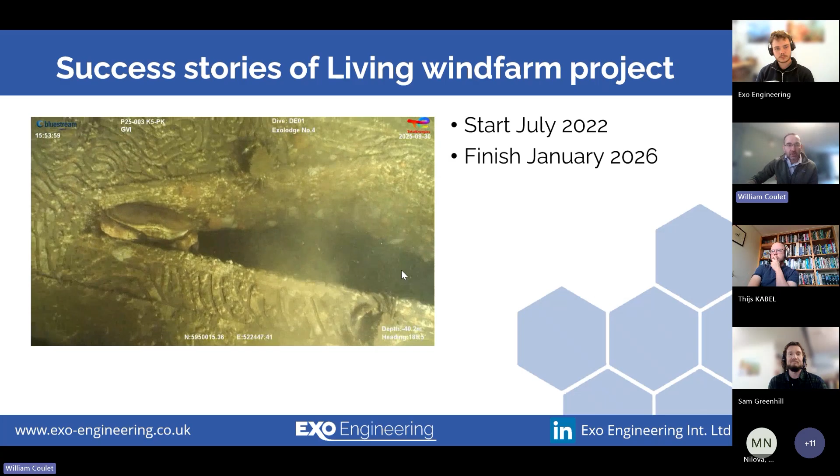We can probably spend quite a lot of time talking about success stories, and we talked about success stories in previous workshops. We have hours worth of exciting footage we could share, and this is one example. I'll just play this short video, and I'm wondering if anybody can guess how many species we can spot in this footage.

This footage was 40 meters depth in the North Sea on our Exo Lodge artificial reef. We encountered 64 species during the September survey, which is an amazing result, and we're very pleased with it.

But rather than basking in the success of what we've achieved, I'd like to share our journey and take you back to how this all began, because the Living Windfarms project didn't start at TRL 1. It started a long time ago.

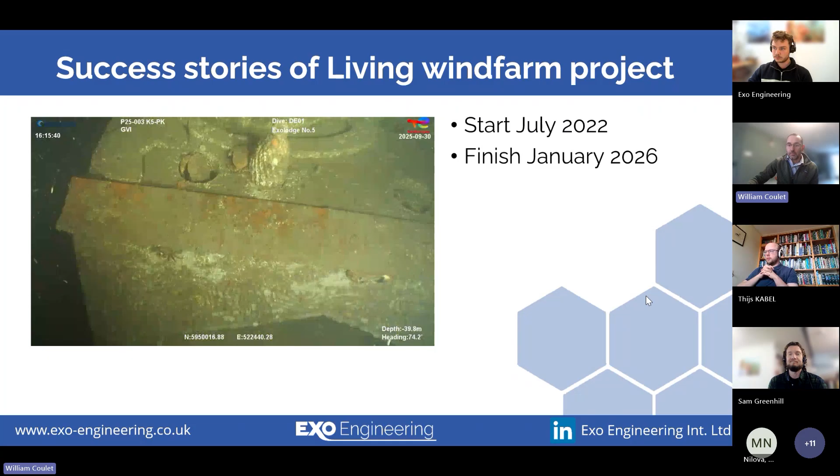So let's go back in time and see where we started. Just for a little background, some information about TRL for those not completely familiar with it: there are a few different approaches, different descriptions of each level. Doesn't really matter - it's a staged approach from 1 to 9.

But you must be wondering, why on earth do we want to start talking about TRL? Because Exo develops products. The TRL stages or levels are really easy to explain where we are, and it runs from basic principle to commercial product. So in order to revisit the entire project, the TRLs are easy to appraise the workflow.

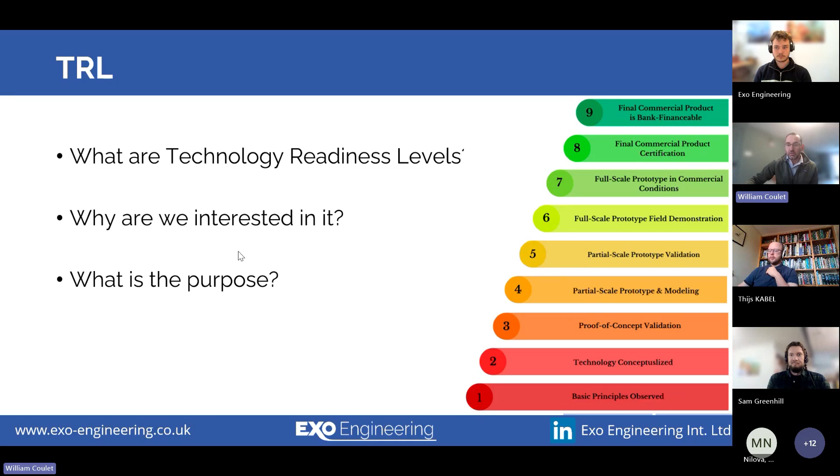There are several factors and market insights we'd like to share, and for that purpose we've split the workshop into these TRLs. I've got the pleasure of covering the early TRLs, whilst Thijs and then Sam will cover later stages.

So we started off a long time before July 2022, before the Living Windfarms project. Particularly, we focused on 2 concepts: GeoBlock trademark and technologies, which developed our mixing blends, and secondly, the design criteria for reef development as researched. In 2022, initial products like the hexagon reef and spheres were explored and tested.

So I'll delve into these in a little more detail. We've carried out more than 8 years of blend development under the GeoBlock trademark, which includes studying carbon content, recycled content, beneficial use of dredge material, local or natural content, and a range of exotic binders, which then led into blend economics.

Blend economics, or the economics of the mixed blend, was a critical aspect for appraisal as part of our growth path. As you can imagine, some of the exotic or unique binders can be very expensive and did not always make it through to market. So from test cube to biocolonization trials, we spent years appraising the options. This is a biocolonization trial carried out in Newlyn many years ago.

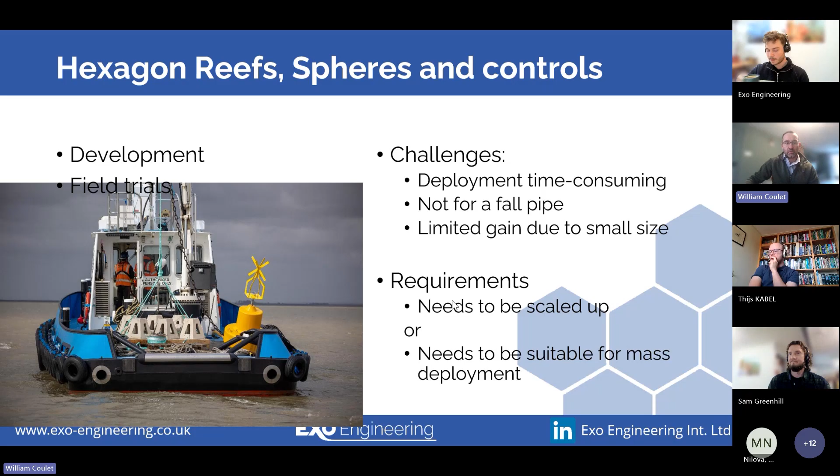So based on these experiments, we were able to further define targets and what the Living Windfarms project should have been focusing on. This involved scaling up some solutions, whilst other solutions were focused on mass deployment. So that's another picture of that deployment.

The third aspect we looked into was stakeholder engagement or market research, carried out in the shape of stakeholder engagement interviews, workshops, and other interactions with offshore developers, contractors, ports and harbours, aquaculture, and coastal protection. It actually improved our understanding of the market and market demand, and in particular the current species and habitats focused on, such as Atlantic cod, sabellaria, and native oysters.

But it was also a criteria to look at the importance of health and safety, especially around deployment. And finally, this market research told us about market demand, specifically around mixing blends and mix economics as well.

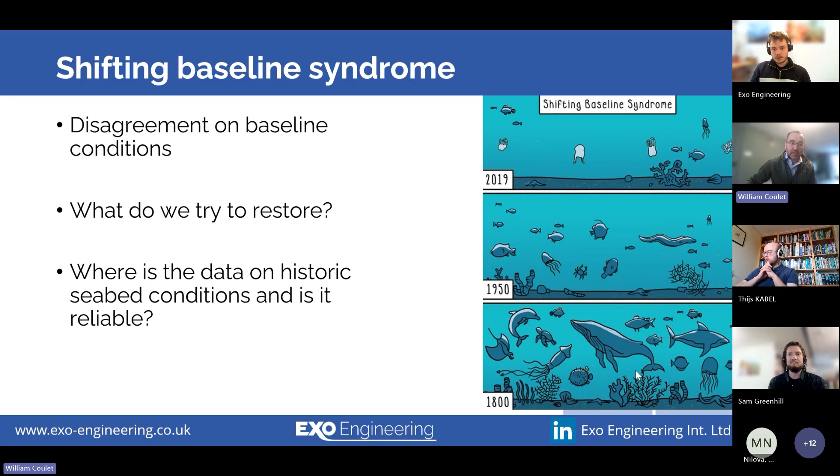So we've been talking about specific species and the target species, but this is only a small amount of species that is actually focused on by the wider market. And the habitats that we use as reference points, such as the baseline habitats, are possibly suboptimal due to the shifting baseline syndrome. So we do need to consider the shifting baseline syndrome when we develop the projects. But we found that there is no international consensus about marine baseline, for example, for the North Sea biodiversity across the bordering nations. So that's an element that we believe needs improvement when it comes down to restoration and nature-inclusive designs. So how are we able to restore the marine environment without the regulated consensus across the borders?

So this market research pointed out specific attention should go to the following criteria, in addition to the blend economics that we've mentioned. Habitat function, for example, and habitat features relate to offering of food and shelter for adults, eggs, or juveniles. The design needs to consider hydrodynamic stability, scour properties, and deployment in order to be successful.

So we had all these criteria that allowed us to create and develop new products.

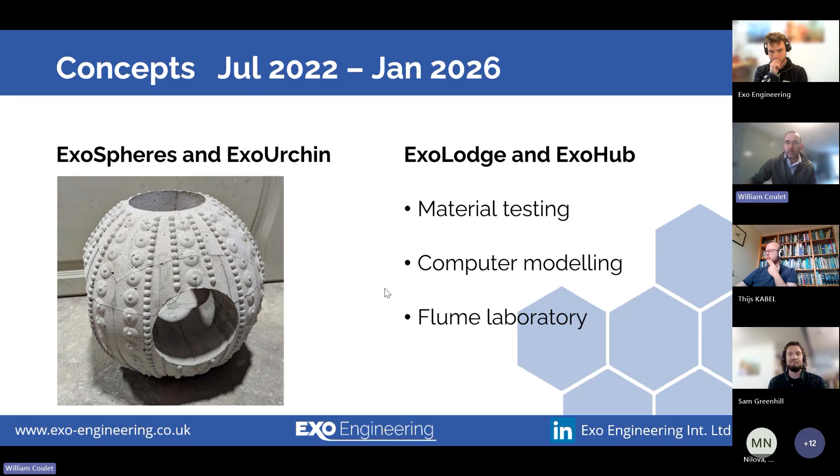So in July 2022, as part of the Living Wind Farms project, we started further developing the exospheres and subsequently developed the Exo Urchin. We also developed the Exo Lodge and Exo Hub. The Exo Hub is focused on native oysters.

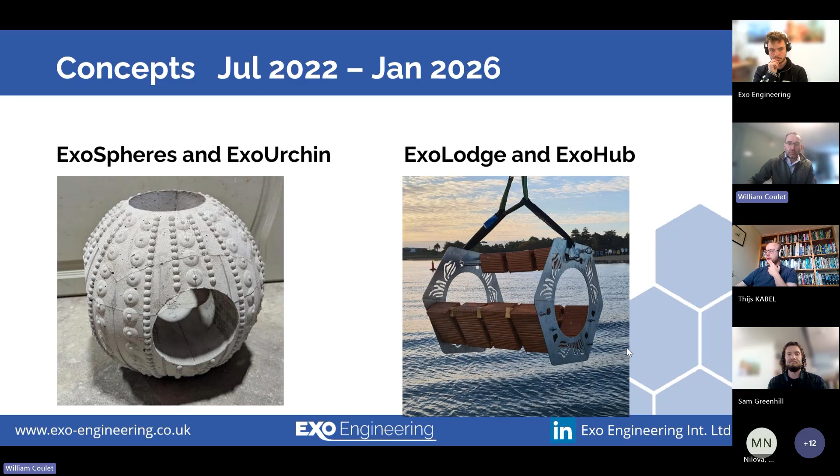So these 4 concepts were further developed during the project, and material testing, computer modeling, and laboratory testing was furthermore carried out.

So my main takeaways from the early TRL was that market research has led to numerous nature-inclusive designs, and those nature-inclusive designs are only limited by our imagination, but sadly have to answer to market demand. If there's no demand, then the nature-inclusive designs don't necessarily make it all that way.

So market demand is often driven by unit cost and deployment methods, and in contrast, blend design, so the binder design, as well as unit complexity, which drives high cost. So unit complexity often drives biocolonization and species richness, but both drive high cost, which is obviously not good for market demand. And only a small number of target species are prioritized, which we mentioned, whilst there is no international consensus about marine baseline.

So these takeaways, I think, are the main takeaways that we had in the years kind of predating the Living Windfarms project.

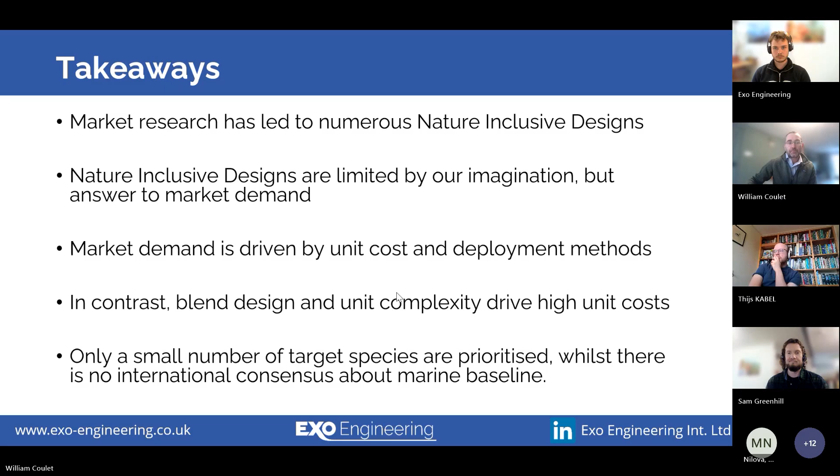So I've got the pleasure now to hand over to Jack, who's going to cover the middle TRL here. So thank you so much, and I'll close my presentation.

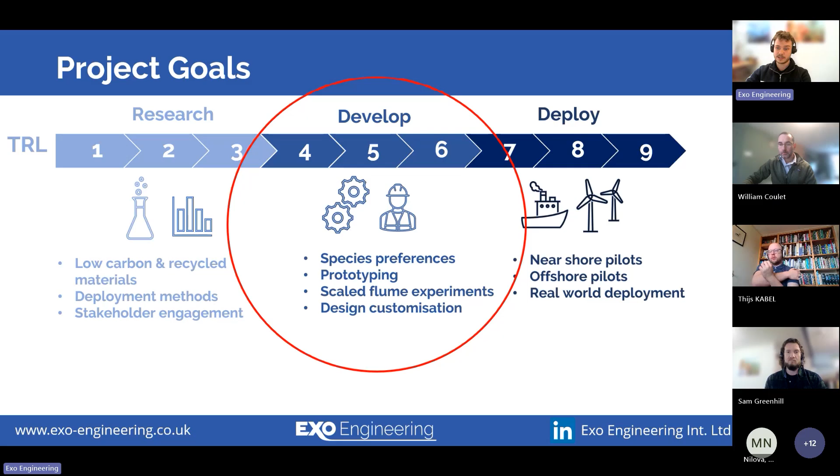As William mentioned, I will be exploring the middle TRL levels, which focus on design, testing, and prototyping. Of course, there is still research being undertaken as we move into the middle TRL stages, but the focus is more broadly on developing concepts and solutions which have demonstrated potential to meet the market needs. These stages involve considering species preferences, prototyping, and scaled flume experiments, and I will also be touching upon the opportunities presented to us through the use of bespoke design.

William has already spoken about material selection and broadly about nature-inclusive design, but it's important to highlight that this only forms part of the consideration. Many of the solutions developed under the Living Windfarms project perform a dual function of scour protection for offshore wind and habitat provision. We therefore need to make sure that by increasing opportunities for biodiversity, that we aren't compromising the functionality of scour protection, and I'll talk about this in a bit more detail shortly.

Looking at ecological function now, though, how can we optimize the design of marine infrastructure to maximize the benefits for biodiversity?

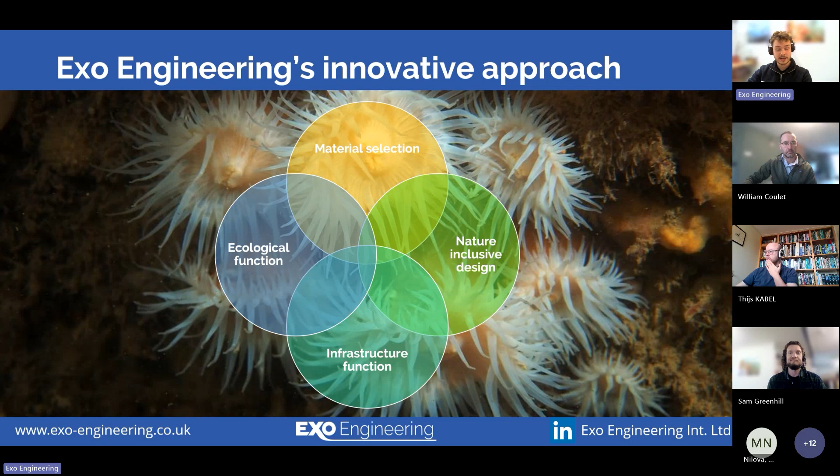As I'm sure most of us will be familiar with, each organism, from phytoplankton to seaweeds to cod, occupy an environmental niche. This is the combination of habitat conditions which are most favourable to the species, and we can think of this as their preference.

And there are a number of avenues that we can explore when considering how to design products with species preference in mind. For Exo Engineering, these fall within 3 broad groups, which are conservation evidence, biomimicry, and tender documentation. Now, of course, this doesn't mean that we pick one of the 3 and exclude the others, and these approaches are almost always used simultaneously.

So to start off with conservation evidence, deployments which have already been undertaken are a great source of information which can shape new, optimized, nature-inclusive designs. These studies are often highly scientific and provide us with information on deployment location, the different successes of projects, and key considerations moving forwards. These are all collated on one platform.

And we know that knowledge sharing and collaboration is essential for continuing the progression of nature-inclusive design. And another platform that we can use is the Rich North Seas Toolbox. Much like conservation evidence, the toolbox presents a range of projects which have been undertaken to enhance biodiversity and provides us with a quick overview of key things like costs, the different species which have been targeted during the project, and among other important aspects.

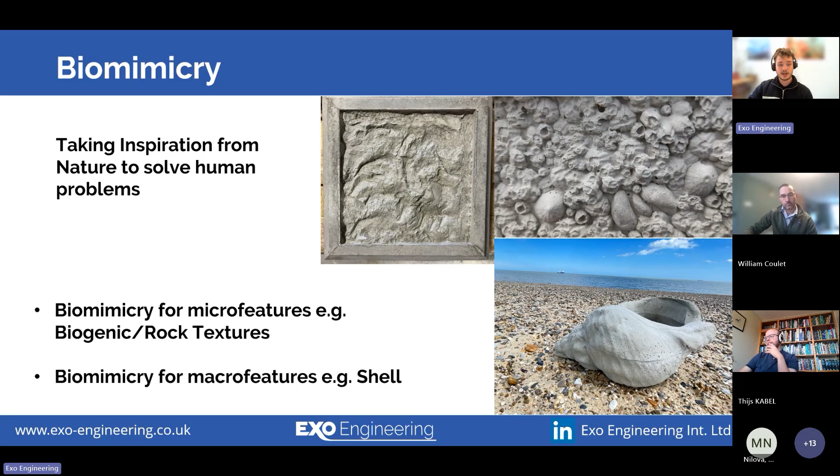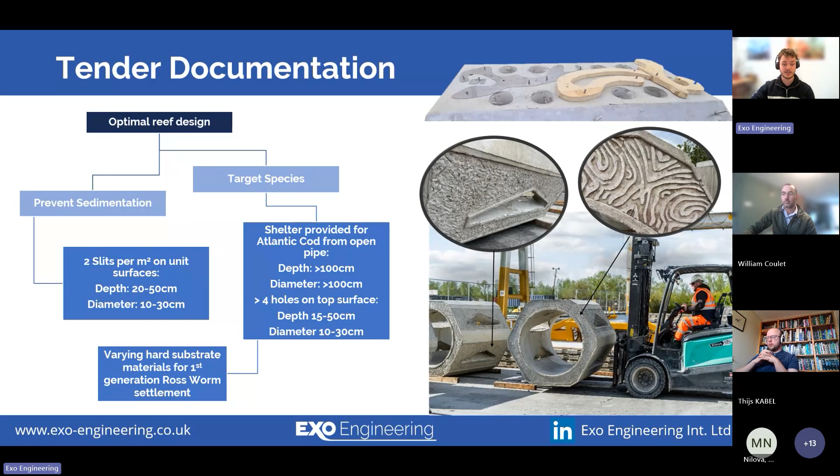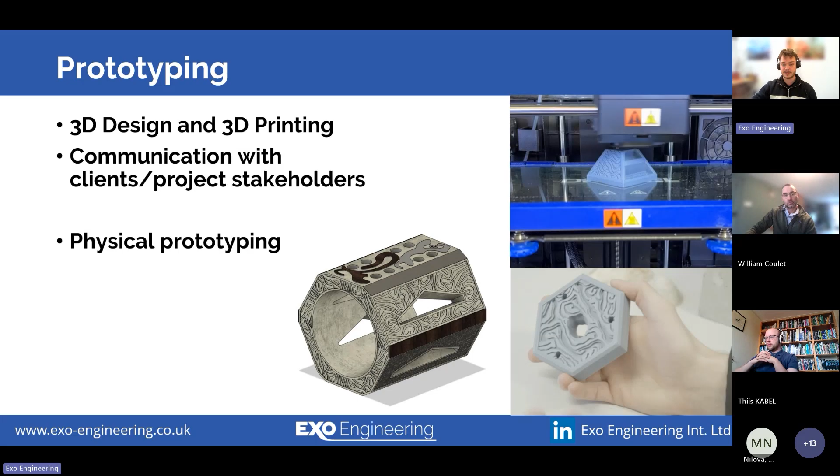After this, we come to the prototype stage. This stage covers a range of aspects such as 3D design, 3D printing, and physical prototyping. Starting with 3D design, it allows us to visualize our ideas and bring abstract concepts to life, applying knowledge gained in the lower TRL levels. It's where ideas really begin to take shape, often involving lots of tweaks before moving on to the next stages. We've also got 3D printing, which is incredibly helpful for visualization, and can help clients communicate designs and ideas more easily through a physical scaled down model. Speaking of scaled down models, we can also use these for flume experiments. Another aspect of prototyping is actually producing the product, which provides information about aesthetics, how it looks, molding and demolding requirements, and can help highlight aspects which might have been overlooked up to this point.

Going back to flume testing — so far we've focused mainly on how we can optimize designs to maximize the benefits for nature. But it's equally important to consider how these units behave when they're actually on the sea floor. For nature inclusive scour protection, it's essential that the anti-scour properties aren't compromised through the introduction of nature inclusive design. We've got a few different methods to simulate the behavior of an object on the seafloor, especially with regard to underwater currents, and one of these is flume tank experiments. In collaboration with the University of Southampton, scaled flume experiments were used to test both our exosphere units and our exolodge units. During the scaled flume tank experiments using the exospheres, results confirmed that they retained very good anti-scour properties — you can see this from the sand waves before the exospheres, imagining the flow of current going left to right in the right-hand photo, and after the exospheres there's not a whole lot of disturbance of the substrate downstream.

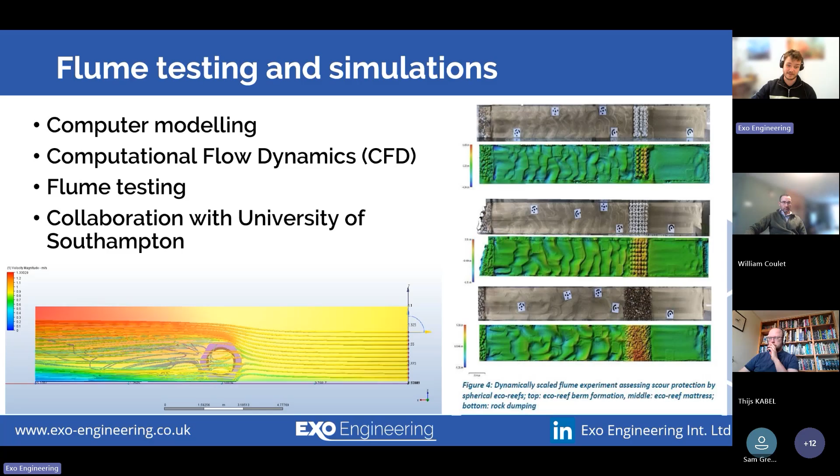That leads us to bespoke design, which is the final topic I will be covering today. When we speak about bespoke design, you might instantly think of designing an entirely new nature-inclusive unit from scratch. And whilst this is something Exo Engineering have done before, such as with the Exo Lodge in response to tender documentation, bespoke design can also just refer to tweaking existing designs.

In order to make sure they are most suitable for deployment in a chosen environment. Many of us probably agree that a one-size-fits-all approach is not optimal across the very diverse range of environments in which we find our offshore infrastructure. And with bespoke design, it gives us a real opportunity to optimize biodiversity enhancements.

So we've recently begun thinking about ways we can tweak the Exolodge design to best fit market demands. This has included attaching sacrificial anodes, which help reduce corrosion at offshore energy sites. We've also looked into incorporating pre-spatted structures, which support oyster regeneration, and even the addition of trees to boost the amount of available habitat for different species to colonize.

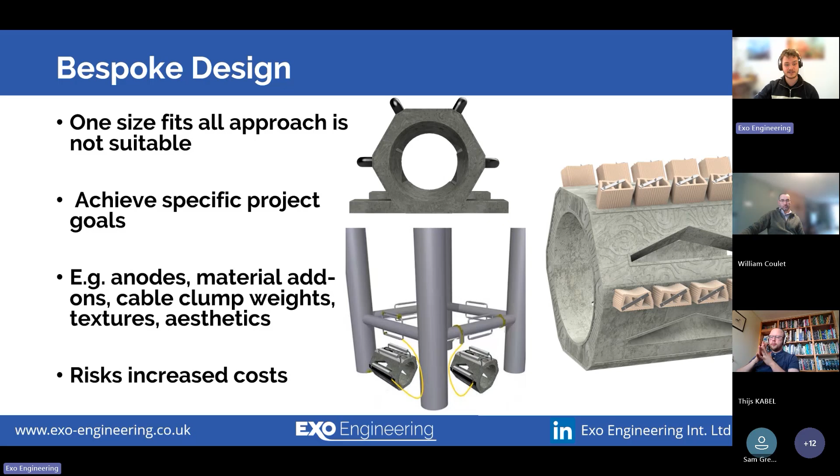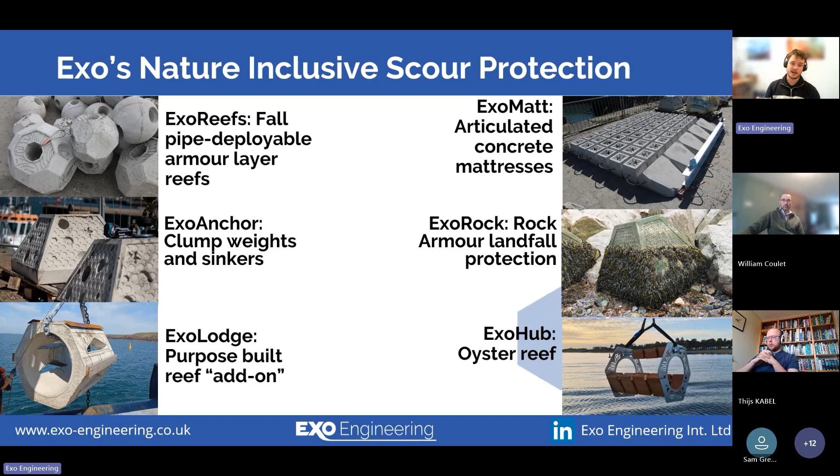Following this process, we've been able to develop a range of nature-inclusive units over the course of the Living Windfarms project. All of these had to be designed with conventional deployment methods in mind and to satisfy market demand in order to streamline that process. They can all be used across different infrastructures associated with offshore wind, cables, landfall protection, and turbine foundations as well.

So just to finish up, we've got a few key takeaways here that are pressing as we move forward, thinking about nature-inclusive design. One of which is: how can we incorporate bespoke design without significantly increasing costs, risks, and timescales?

I think we know already, but more collaboration is definitely needed, continuing that collaboration, which of course the Living Windfarms project and these workshops is helping to do. The Living Windfarms project as a whole involves cost and knowledge sharing, which we know is really beneficial to advance nature-inclusive designs.

Additionally, new technologies such as 3D printing and computational fluid dynamics are really helpful for de-risking new technologies, as well as communicating ideas more effectively across different stakeholder groups. And finally, of course, nature-inclusive scour protection must retain functionality alongside biodiversity enhancement. This cannot be compromised.

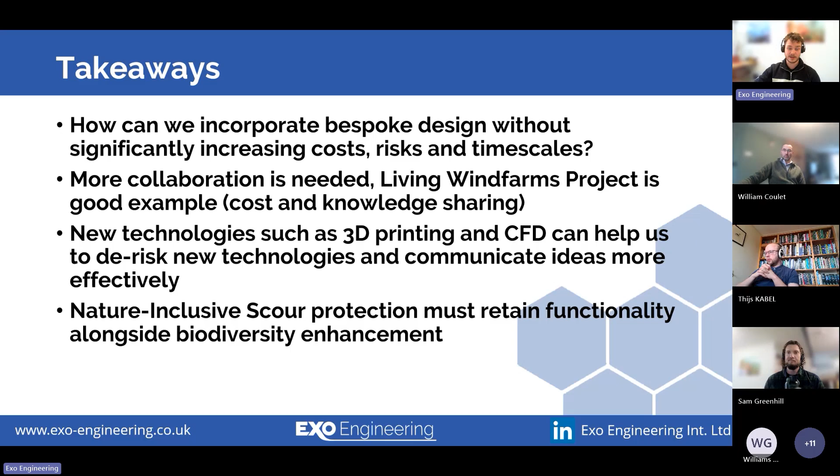Okay, that leads me to the end of my presentation. I will now be handing over to Sam, who is going to talk to us about pilot deployments in a bit more detail.

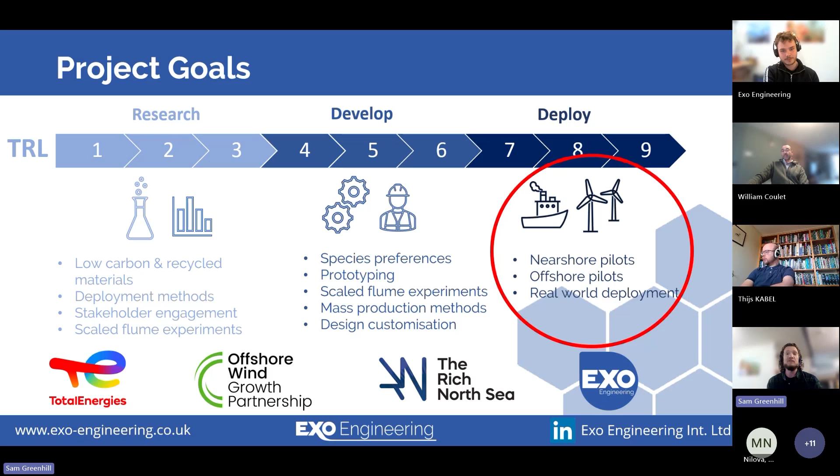So going back to the Living Windfarm Project's TRL levels, I'm going to be covering some of the work we've done towards the later TRLs, discussing some of the work on our nearshore and offshore pilot deployments, which have helped us towards our readiness for real-world commercial deployments.

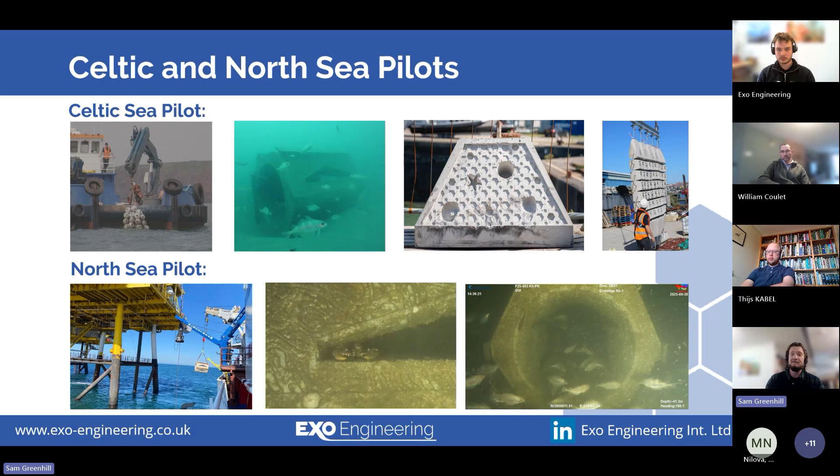So I'll be focusing on two of our pilots in particular: our nearshore Celtic Sea pilot, which you can see some images from on the top row there, and our offshore pilot in the North Sea shown in the lower images. So firstly, looking at our Celtic Sea pilot, this ran from September 2023 until April 2025.

The project was undertaken in partnership with Marine Energy Wales, ORE Catapult and Horizon Energy, and we tested nature-inclusive scour protection solutions in the Marine Energy Test Area, or META, which is off the Pembrokeshire coast in South Wales. This is a pre-consented test site made available for the testing of offshore energy technology, and our solutions were deployed at the nearshore East Pickard Bay site, which sits at approximately 20 meters depth.

So we tested various nature-inclusive design concepts for offshore wind scour protection, with over 16 tons of nature-inclusive units deployed at the site.

This included our Exo mat, which is a nature-inclusive articulated concrete mattress for cable protection, and our Exo reefs, which are fall pipe deployable reef spheres that form part of the armor layer around monopile foundations. We deployed two of our large Exo lodges, which are purpose-built standalone reef units that we've already briefly discussed. These target specific species and have a sole function to boost biodiversity. And finally, our Exo anchors.

These are nature-inclusive sinkers and clump weights, which create reefs as part of mooring systems, and here they were used to anchor scientific monitoring equipment at the site.

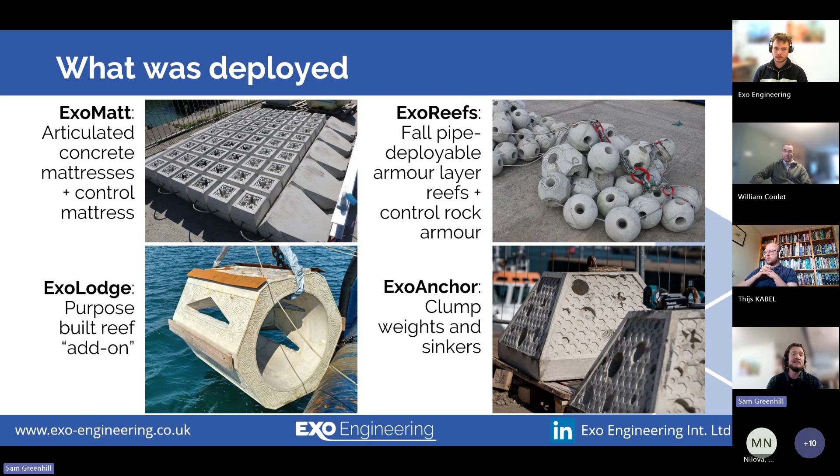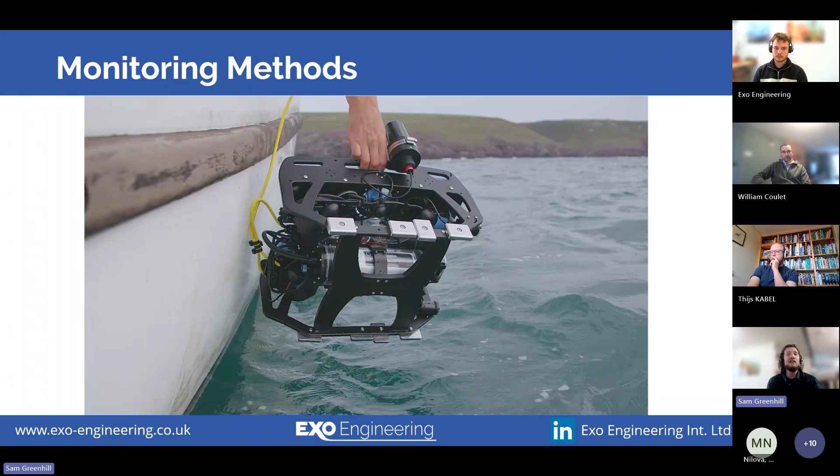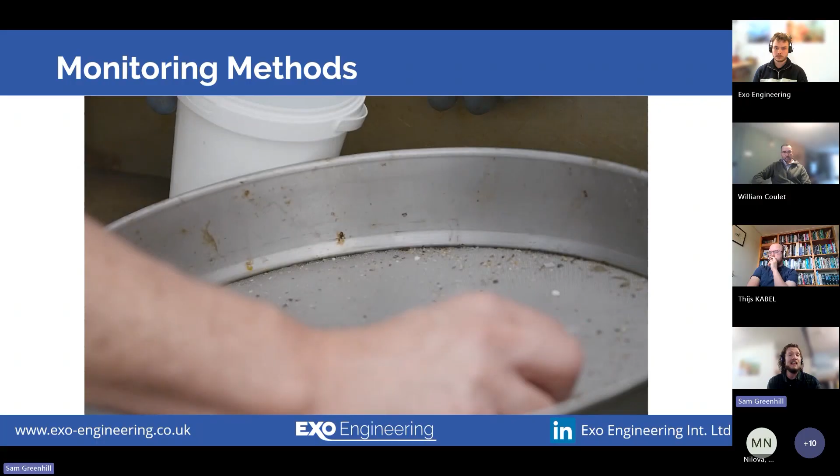So I've got a short clip which shows some of the range of monitoring methods we used throughout the project. These include using remotely operated vehicles and other underwater video techniques to assess the mobile species using the structures. Sediment sampling techniques were also used, including taxonomic identification and environmental DNA to assess changes in the species living within the sediments of the sites as well.

Because we've just got a very limited time today, I can only give a quick overview of some of the results, but from the video data obtained, it does suggest that the ExoLodge standalone artificial reef units may have the potential to provide habitat for a greater richness and abundance of mobile species than either the natural sand habitat or the nearby nearshore natural rocky reef might achieve on their own.

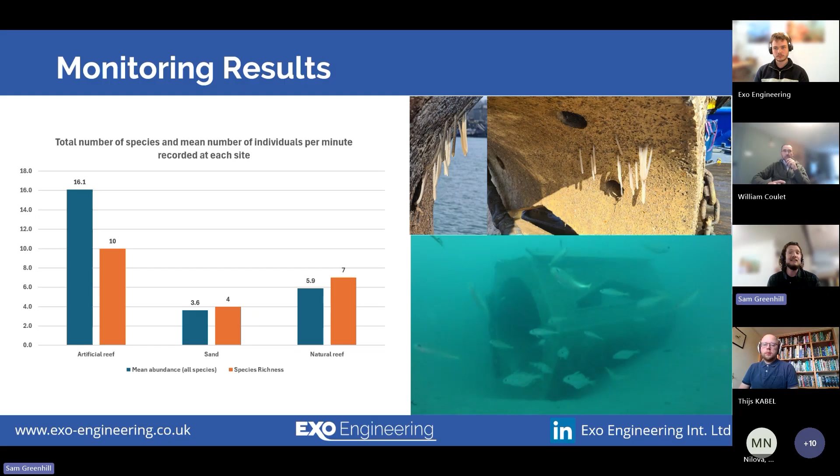In addition to the species recorded using the underwater video techniques, another 21 species were also recorded colonizing the Exo lodges when they were recovered at the end of the project. These included squid eggs, which you can see in the image on the top right there, attached to the inside of the large central tunnel. As well as this, there were juveniles of many other sessile species colonizing the units. This suggests that these structures could play their part in providing shelter and habitat that would be needed to allow for a potential nursery ground to develop.

Although the site did provide some great results for our exolodges, it proved to be more challenging for many of our other nature-inclusive scour protection units because of the environment it was in. As the substrate consisted of soft sands and the site often experienced strong currents, over time many of our more low-lying units became buried, which meant their nature-inclusive designs weren't able to provide the optimal habitat that was intended. This goes to show that in some environments, many nature-inclusive designs might not produce optimal results, and it'll be important to marry up the most appropriate nature-inclusive designs with the environmental conditions present at the wind farm site. Despite these challenges, that's not to say these kind of test sites aren't useful. In fact, quite the opposite.

Pre-consented test sites such as META in South Wales are rare, but being able to use them allows for a significantly reduced timeline from concept to real-world deployment. The availability of more pre-consented test sites in a variety of different environments would help to better achieve these goals.

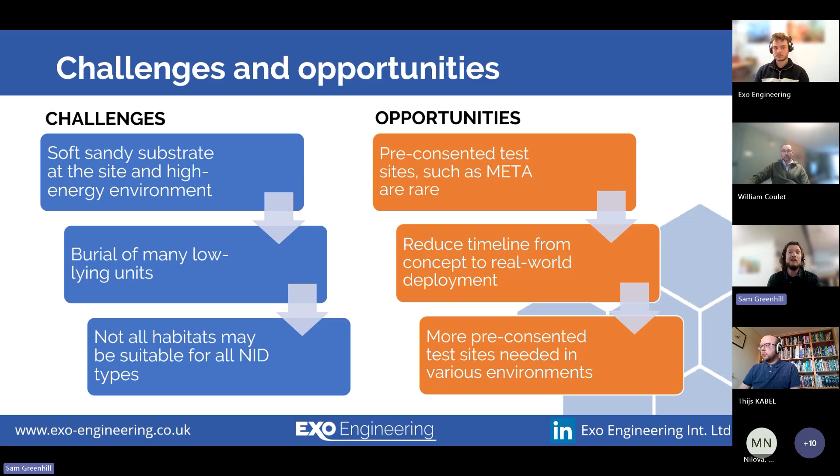So next, moving on to our offshore pilot. In collaboration with Total Energies in the Netherlands, 5 of our Exolodge standalone artificial reef units were deployed at 40 meters depth at the base of one of their platforms in the Dutch North Sea in July of 2024. These are being monitored for a minimum of 5 years alongside existing operations, making use of pre-planned maintenance inspections using work-class ROVs at the site.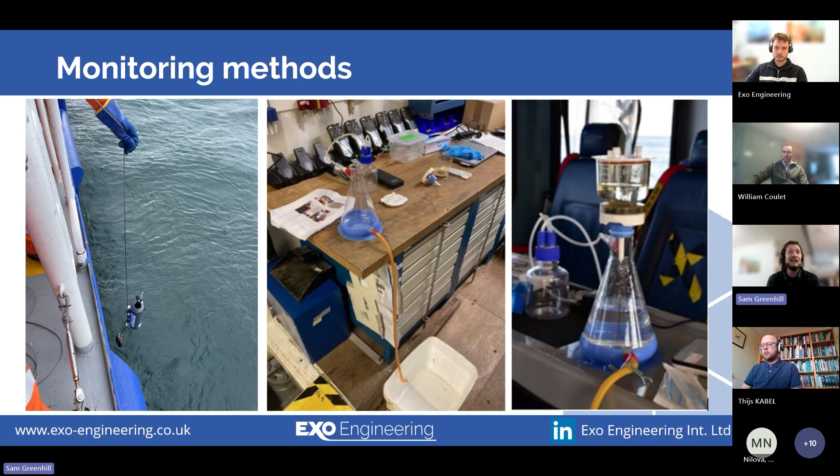These include collecting video footage of the units to compare to the existing structure and other controls, and also recovering smaller removable reef elements from the exolodges to assess the sessile colonizing species present. In addition, environmental DNA techniques are being used to assess changes to the species present over time in comparison to control locations nearby.

So 1 year monitoring at the site was undertaken last September. Here's a short clip from some of the ROV surveys that were undertaken.

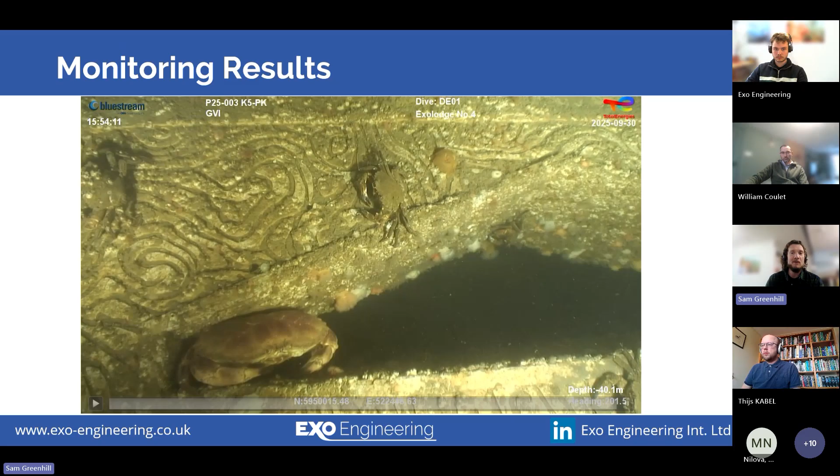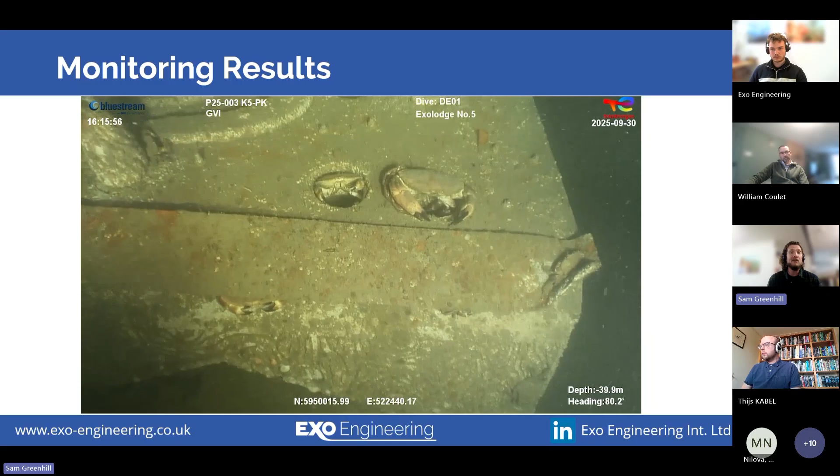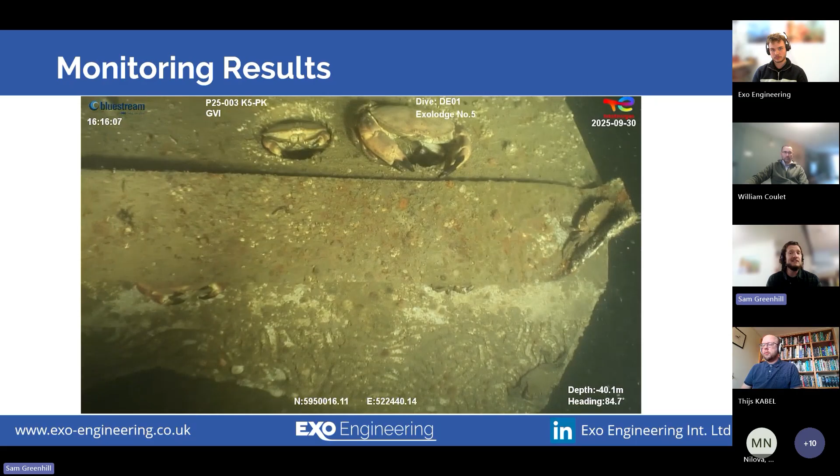So from these video surveys of the exolodges, 21 species were recorded in total. We can see that different species are using different design features that have been included, as these design features are creating various habitat niches for species to take advantage of. Crabs and lobsters are using the holes and crevices of the exolodges, as these were present in much greater numbers than on our control block, which was deployed at the same time but didn't have any of these same design features. Large numbers of fish, such as pouting, a smaller relative of the cod, can be seen taking advantage of the small central tunnel here for shelter as well.

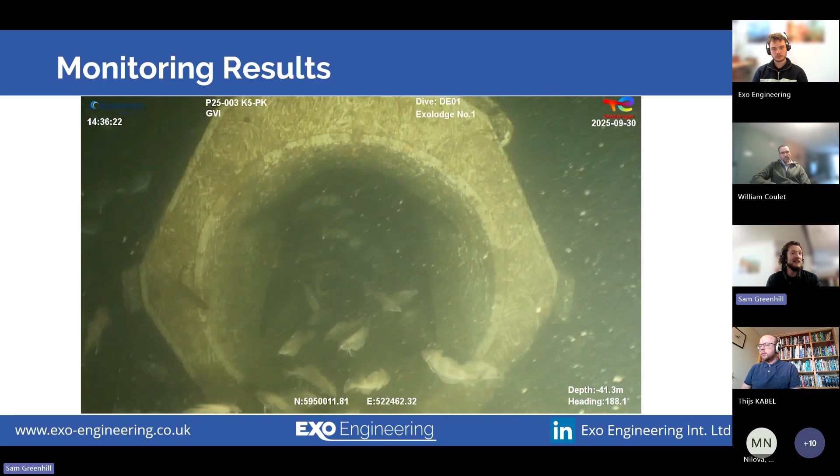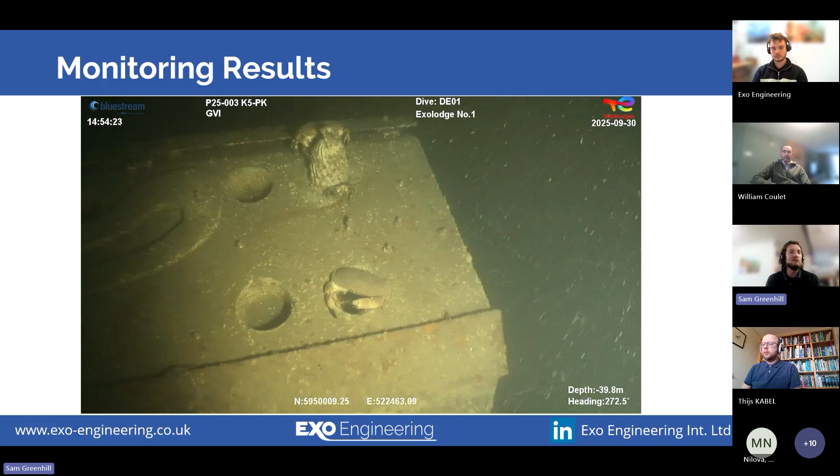And on top of the exolodge, you can also see one of our small removable reef plugs. Using the ROV's multi-purpose arm, one of these was removed from the top of one of our exolodges. It was preserved and then sent for laboratory analysis of the species present.

From the taxonomic analysis, a further 43 colonizing species were recorded, including the tube-building ecosystem engineer rossworm, Sabellaria spinulosa, as well as juveniles of many other species including worms, sea urchins, sea anemones, bivalves, and many species of crab, including the brown crab we've already seen making use of the holes in the tunnels and voids of the exolodges. So even after one year, it appears that the habitat-forming design features not only attract species, but potentially also improve the overall productivity of the local ecosystem.

This highlights the ability to design features to both target certain species and potentially also improve ecosystem functioning overall.

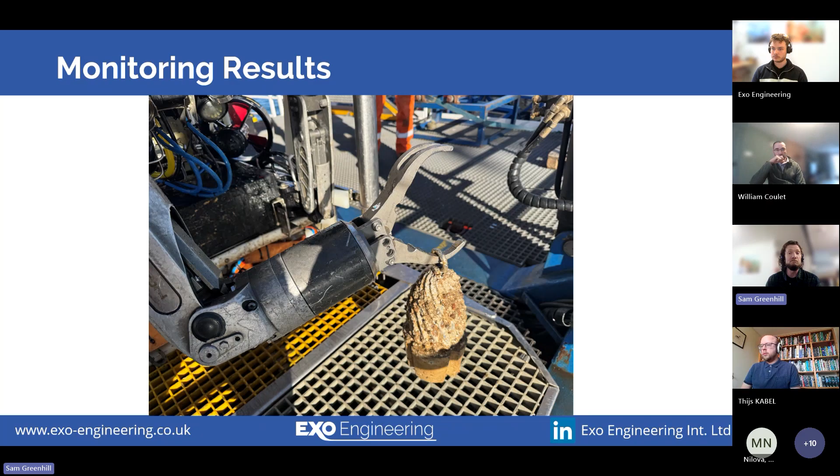Looking on to our ongoing and future pilot work, monitoring of the North Sea pilot at the TotalEnergies site will continue in the coming years. Recovered exolodges and exo anchors from our Celtic Sea deployment have been repurposed and used as part of the infrastructure for a multi-use site in the Bristol Channel, combining aquaculture with seabed restoration, and we'll be monitoring their effect as part of a larger multi-trophic system going forward.

We've also trialled standalone artificial reef units which incorporate elements with remotely set native oysters. These can help restoration efforts for the species, as well as providing habitat for juvenile fish and other species in a similar way to the exolodges.

So finally, just to reiterate a few takeaways from my talk. Firstly, a one-size-fits-all approach is unlikely to work in all environments. Some nature-inclusive design options may be less appropriate depending on the substrate and environmental conditions present. Pre-consented test sites should be celebrated, and more should be available to test nature-inclusive design options for wind farms in a variety of different environmental conditions.

Some nature-inclusive design options may even provide a biodiversity uplift compared to natural habitats present locally, and can provide important nursery grounds for juveniles of many species. This may help speed up the recovery of degraded ecosystems through the reintroduction of hard substrates that were once present. Finally, designing for target species can be optimized by creating bespoke designs which include habitat features catering to these specific species. In this way, wind farms could create a haven for commercial species like crabs, lobsters, and cod, from which a spillover effect can be created, potentially benefiting local fisheries as well as boosting biodiversity overall.

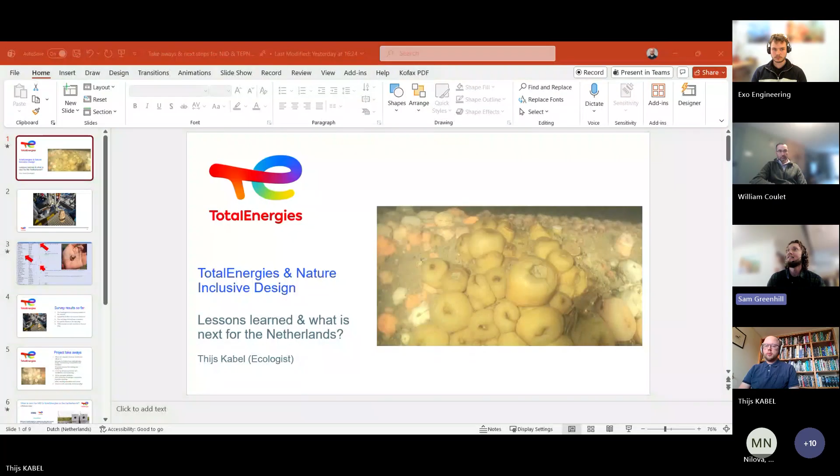Good afternoon, everybody. I will be telling you about the lessons we learned from our participation in the Living Wind Farm project, and what the next steps for nature inclusive design and Total Energies in the Netherlands will be.

So why did we want to have this removable reef block on our exolodges? Because we were really interested in the marine growth developing on these units, since one of the target species was Sabellaria spinulosa, the rossworm. The problem with the traditional method of monitoring these reefs using, for example, ROV, is that cryptic species hiding in the marine growth can't be observed. Also with eDNA, it's sometimes difficult, because you know a species is there but you don't know if it's on your reef, since Sabellaria also has a pelagic stage.

So it could be that you're measuring in your eDNA larvae of Sabellaria. So we wanted to be able to get a scrape sample, but traditionally you would send down a diver with a little scrape and a cup to collect samples. From safety concerns, we don't allow diving near our platforms, and we really try to minimize the amount of diving activities near our platform. So we needed an alternative to obtain these scrape samples.

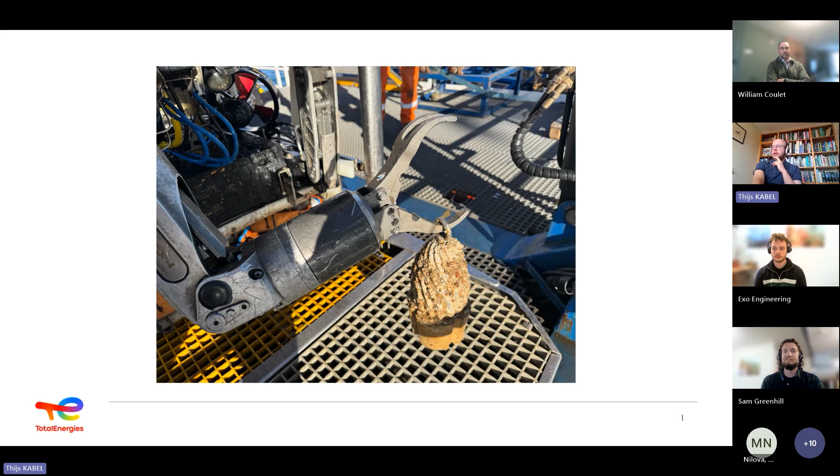You can see a lot of barnacles. We have the Sabellaria spinulosa, which is of course an important policy species, and we'll be interested to see if in future years we will keep finding Sabellaria on this reef, or if Sabellaria is only acting as an early colonizer in the ecological succession, and then later on we might not find it.

So that will be really interesting to follow, whether Sabellaria will be present during the monitoring period. And we got a large amount of these porcelain crabs, almost 700 of these tiny crabs. I think that was also very interesting, an indication of how productive this little ecosystem can be.

So what were the survey results so far? Of course we don't know the conclusion yet because we had only one year of monitoring, so these are just the first impressions. But overall, we're happy that the seabed, the Exolodges, have remained stable on the seabed.

We saw typical North Sea reef species. The reef plug retrieval was a success, looking at the species richness, but also from a safety point of view, and also for our logistics, everything went quite well.

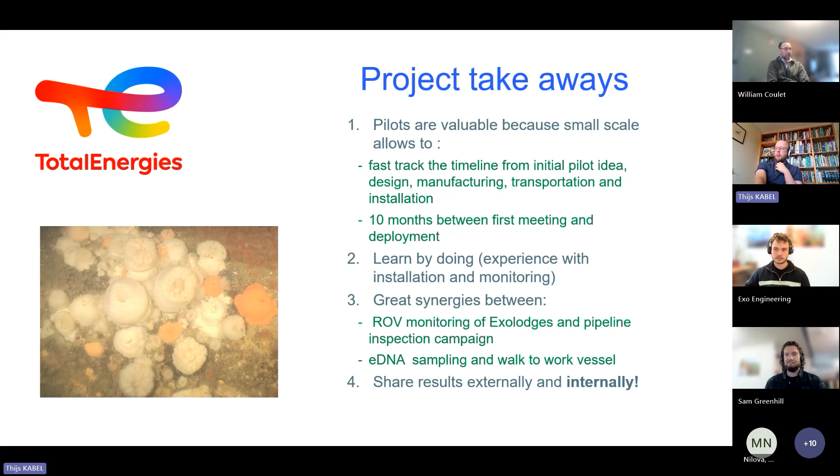But what is next for nature inclusive design for Total Energies Netherlands? Because it doesn't end with this pilot project. Last year, around December, we released a press release that together with RWE, we are co-owners of Oranje Wind Farm in the Netherlands, where we'll be deploying 66 of these ARC marine Reef cubes.

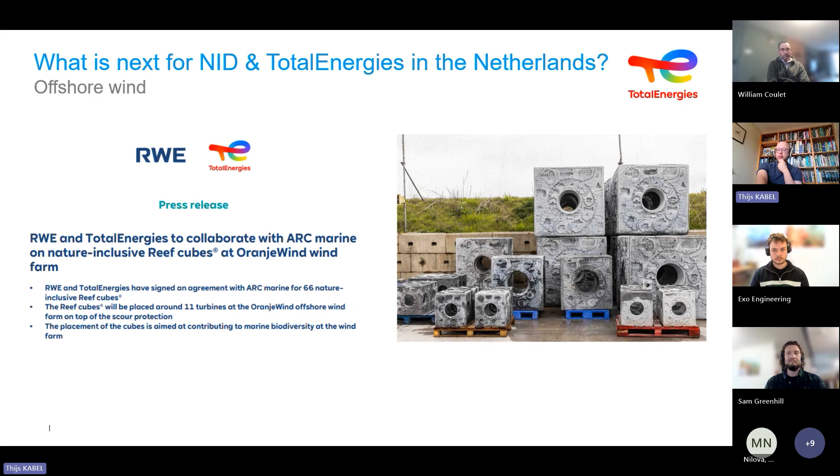So that means that we are also in offshore wind. We will be further developing this nature inclusive design and trying to enhance the biodiversity of the scour protection. But we will not only be doing this for offshore wind development - we will also be applying nature inclusive design for carbon capture and storage.

Total Energies is part of the Aramis project, which is a large CCS project in the Netherlands, and we will be converting Alpha from a gas platform to a CO2 injection platform. And we will be looking at the following nature inclusive design elements.

We will be implementing nature inclusive design mattresses. We will be looking at nature inclusive anode support units, as also previously mentioned. Why do we need these anode support units? Well, this jacket has been in the water for 30 years, and the current anodes will not provide protection during the operational phase that is planned for the CO2 injectors.

So we need to add additional sacrificial anodes, and we think that a nature-inclusive design anode support unit could be a very interesting option to give biodiversity a boost.

We'll also be looking at tree reefs, because during stakeholder engagement on nature-inclusive design, it's agreed in the North Sea Agreement that all future offshore energy infrastructure in the Netherlands must have nature-inclusive design. During that engagement with different NGOs, they were looking for scalability, and together we came up with tree reefs as an interesting option to deploy. So all partners involved in the Aramis CCS will be deploying these tree reefs.

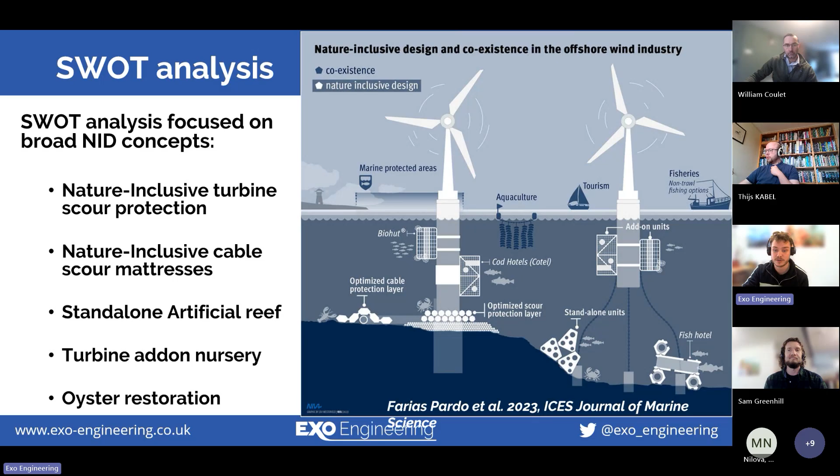For those who attended the workshops in November, I'm sure you remember completing a SWOT analysis for each of the 5 nature-inclusive concepts on the slides here: nature-inclusive turbine scour protection, nature-inclusive cable scour mattresses, standalone artificial reefs, turbine add-on nurseries, and oyster restoration. We had really good engagement with the SWOT analysis, which provided us with some really helpful insights into the different perceptions of the different groups on these interventions.

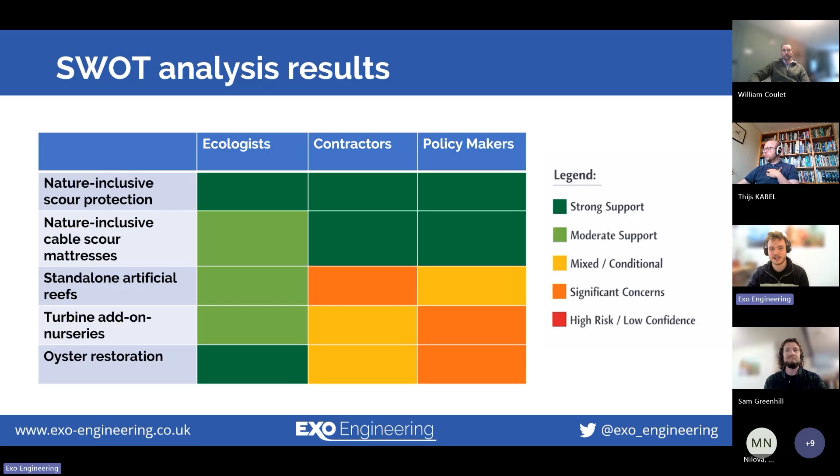It's also important to bear in mind that we had a relatively small sample size for this SWOT analysis, which is what it's based upon, so sector-wide perceptions are likely to differ a little from this, but it gives us a nice insight.

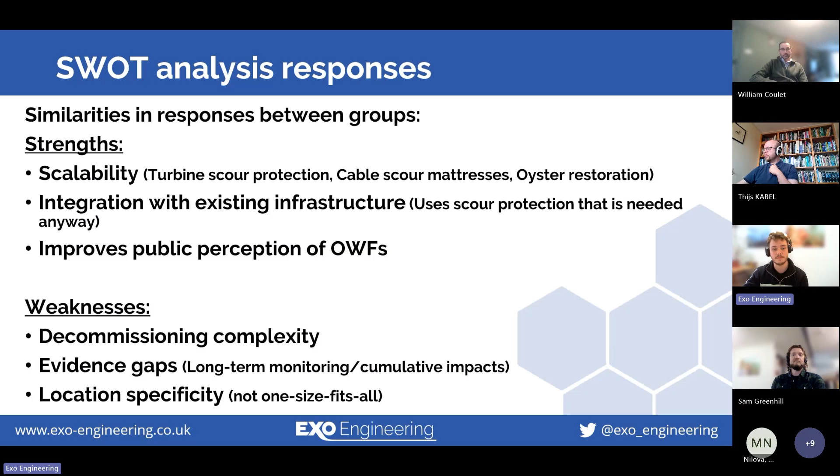Moving on to the weaknesses, the complexities associated with decommissioning was something that was suggested, in addition to evidence gaps caused by long-term monitoring campaigns needed to gain an overall idea of biodiversity impacts at a site. We also had location specificity as another weakness - not using a one-size-fits-all approach, and the need for a potentially more bespoke approach to nature inclusive designs.

Continuing with the similarities in responses between all of the groups regarding opportunities: embedding nature inclusive design into future offshore wind farm development, having this as part of the planning stages and being a key consideration, is a real opportunity for nature inclusive design within offshore wind. Additionally, there are collaboration opportunities between developers, scientists, NGOs, and shared learning, which can lead to better standards of nature inclusive design. And finally, we come on to the threats.

I think this is a really prominent threat: greenwashing, especially when ecological benefit is unclear. We need to think about how that can be mitigated moving forwards if we're seeing nature inclusive design being used more widespread in offshore wind farms. Additionally, we've got current policy dependence - if we see changes in political priorities, nature inclusive design might change in terms of how much it's viewed as a priority. And finally, unintended consequences such as structural instability of existing offshore wind farm infrastructure, as well as ecological imbalance.

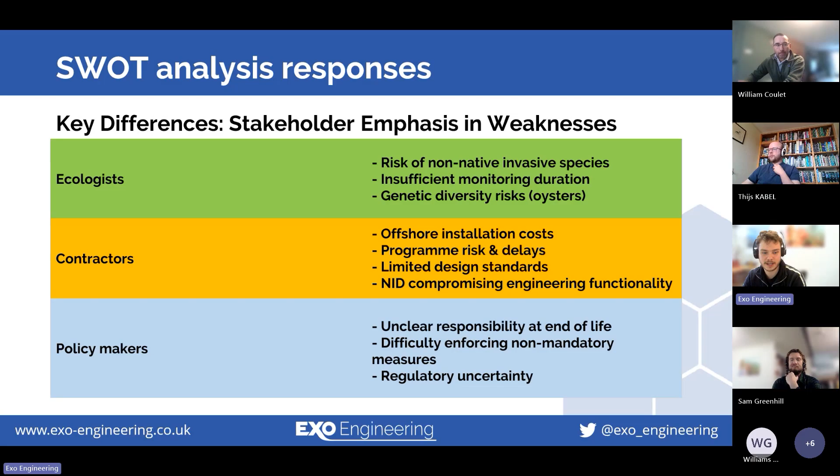Yeah, absolutely, and I think that's covered a little bit by the SWOT analysis takeaways we've got here as well. It's really difficult to get the balance right between whether we want something mandated and that being the way forward. As we saw in the SWOT analysis, a lot of people didn't think that was the way forward, so encouraging in the right ways is definitely a key consideration.

Some of the headline points from the SWOT analysis and takeaways we picked out were a combination of habitat provision with existing infrastructure being a key strength, identified by all. We've also got varying location characteristics creating challenges for a one-size-fits-all approach, introducing exactly how we might use bespoke design to solve that problem.

We've also got nature inclusive design depending on current policy and susceptible to changes in political priorities, probably quite an important point at the moment. And we've also got differences in priorities between groups, highlighting the continued need for collaboration and knowledge sharing. So I think that covers the SWOT quite nicely.

As I say, more detailed results will be published following the workshop as well. I wondered if there were any questions from the audience at this time. If not, we do have a few questions prepared that we thought would be quite interesting to discuss.